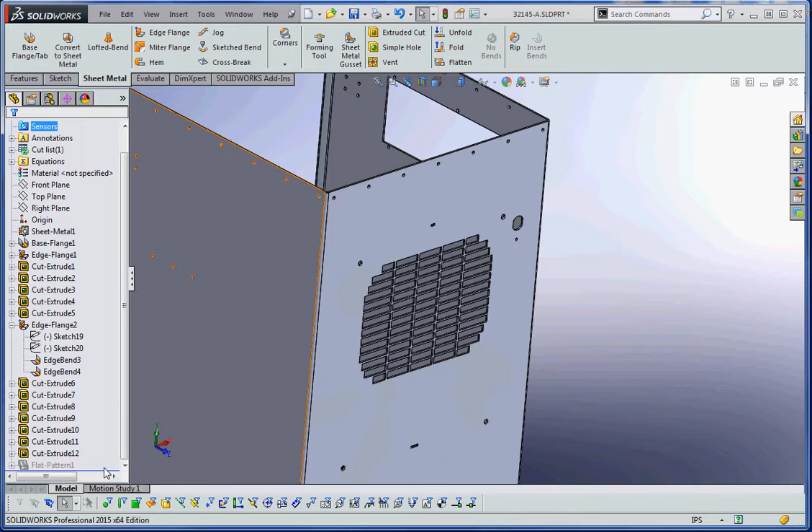Hi Matt, I promised you a video, so I thought I'd show you a video of the part you sent me and the parts that I made. There's a lot of similarities, so I think we're doing things the same way. But I just want to go through this and make sure the assumptions I'm making are correct.

So let's go back to the base flange in the part that you sent me, which is 32145-A. The base flange is pretty simple, you have your sketch that defines all that. I like the idea of using symmetry in the middle of that sketch, and a lot of sketch geometry in here to lay this out. You do the same thing I do, just a center rectangle, put the dimensions on them, and then put your circles on the very ends to define where the holes are going to be. That works out pretty well.

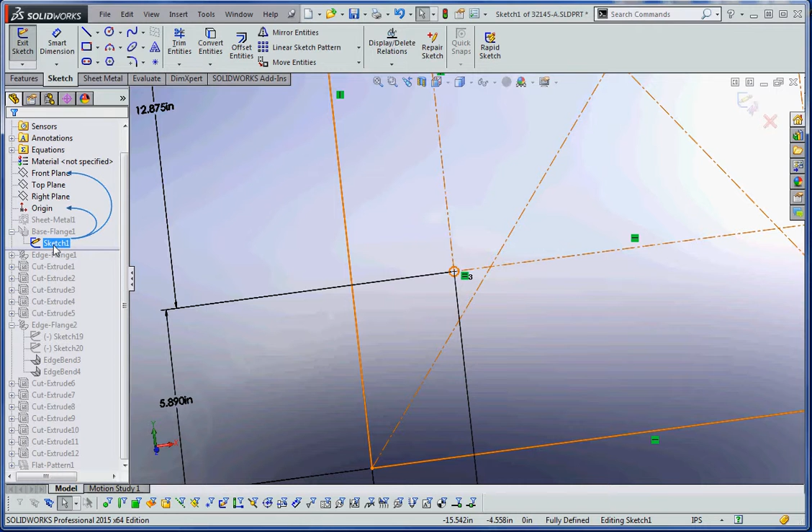The only difference is I usually put my circles that define the holes as a separate feature, something different besides the base flange. Even though I'd probably still use that same sketch geometry, I'd use a different feature, the extruded cut feature, to put those holes in. It gives you a little bit of flexibility, so you can go in there and maybe delete the holes or put them in a different configuration.

So then you put your edge flange in. That's pretty basic stuff, and then you have your extrude for the louvers. And again, you do the same thing I do, a lot of sketch geometry in here, and then we lay this out.

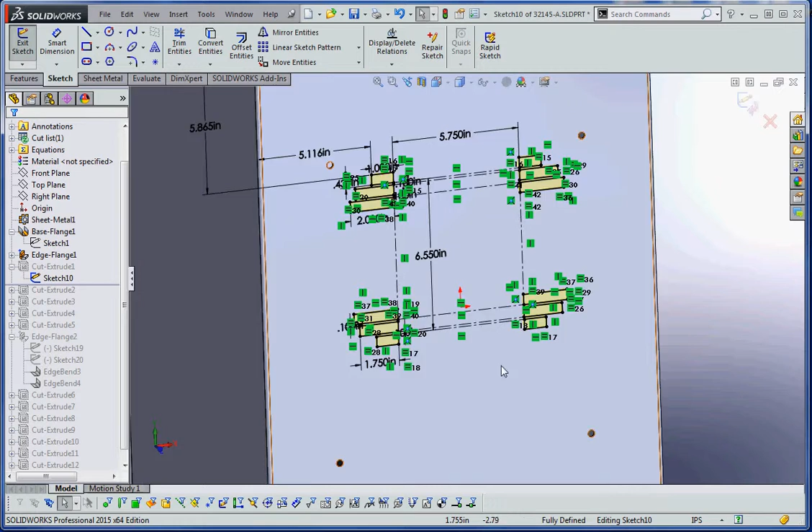One thing I would do a little differently is it appears this is probably going to be in the middle. So I would make some reference geometry to the center, from an axis going along the y-axis, and then put in this dimension. Instead of having it as a defining dimension, I'd have it as a driven dimension. It would still be visible in the drawing, so when somebody's trying to lay this out, they can lay it out from an edge, since they can't measure from the center. But if the intent is to put it in the center, I would put it in the center too.

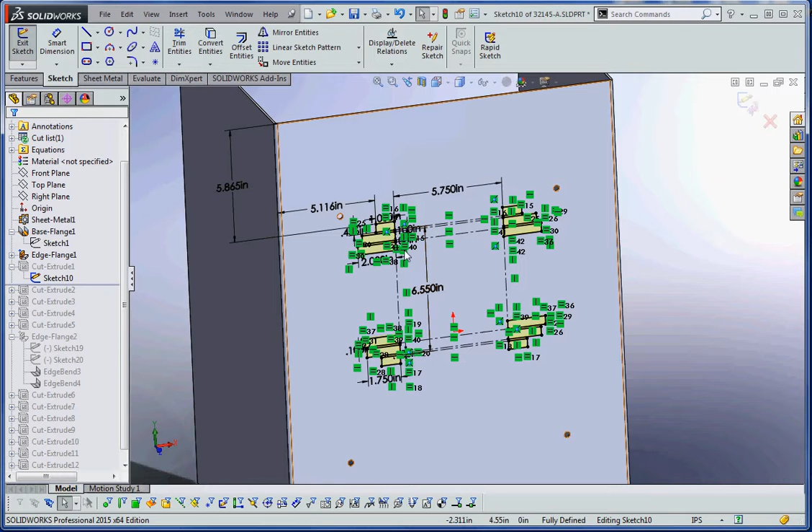But the end result is we end up getting the same thing. One thing I noticed too about this third cut, you have a linear pattern in here. A lot of times these linear patterns are kind of tricky. You define it, but yet they're still blue, they can still be stretched.

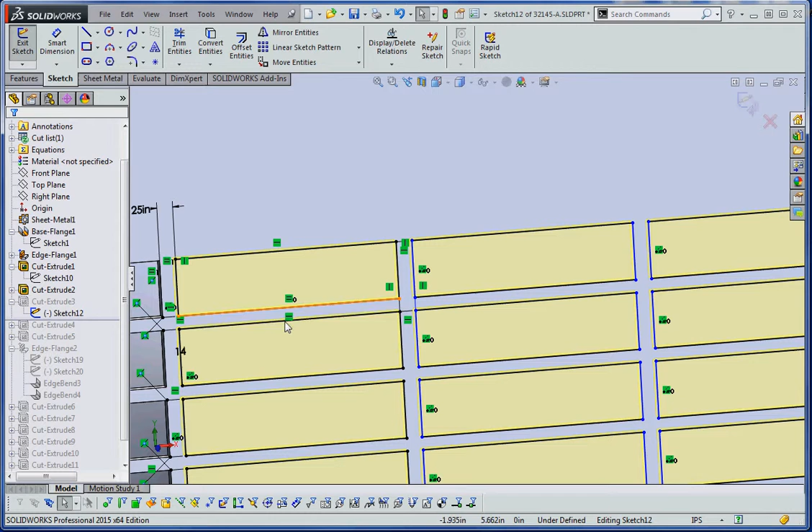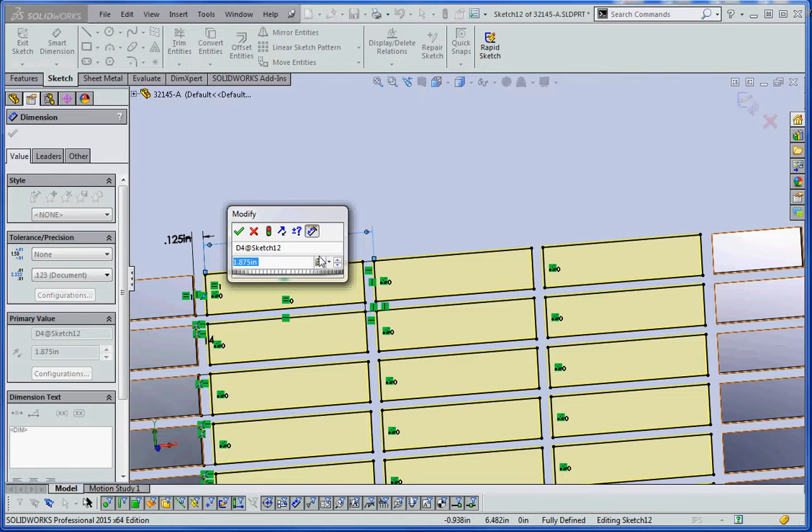So one thing you need to do, and I think you did it here, you have a horizontal relationship between some of these elements, so it doesn't all stretch. But you'll notice if you take some of these blue lines over here, they do stretch a little bit. If you do Control Z, that gets you back to where you were before. But all you have to do is throw in a simple dimension, like maybe from this edge to that edge, which is one full cycle, and then put a green check mark on that.

Not certain what that was all about, but it looks like it turned off my sketch relations, which is probably okay. But anyways, if you put that in there, I think it'll work out okay. Makes it all black, that way it doesn't stretch out on you sometime later.

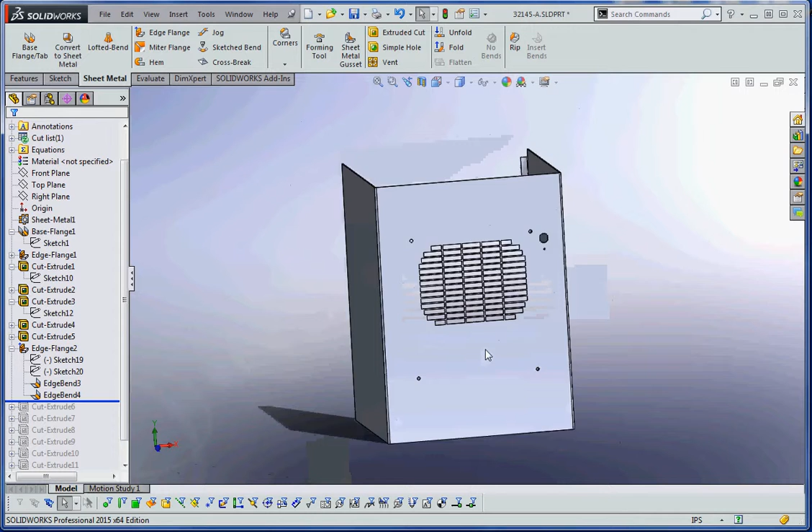And then you put in your features here. You put your edge flange in back, I would assume, to put that other grill in there to provide ventilation or filtration. And then you put in your holes too. I do the same thing.

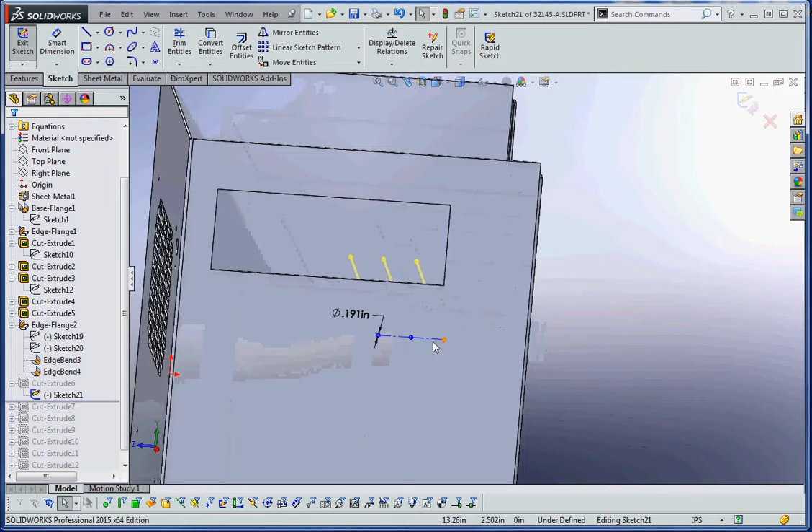One thing I do a little differently is I would put in a sketch that would have all the holes in it, so you have one sketch that drives all the features that follow, or maybe just one feature that has all those holes in it. But the thing about that sketch is you have the capacity to go in there in one location and change some of the holes, because some of these holes have relationships with other holes. It's nice having some sort of sketch document that has all those relationships in it.

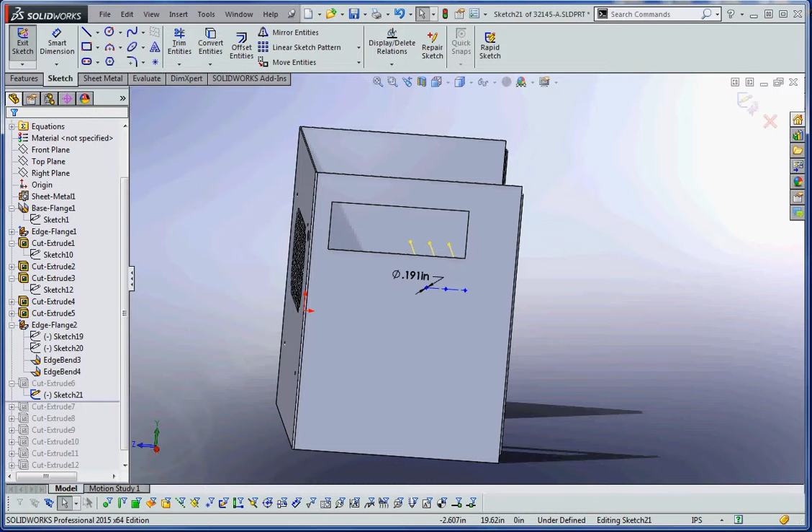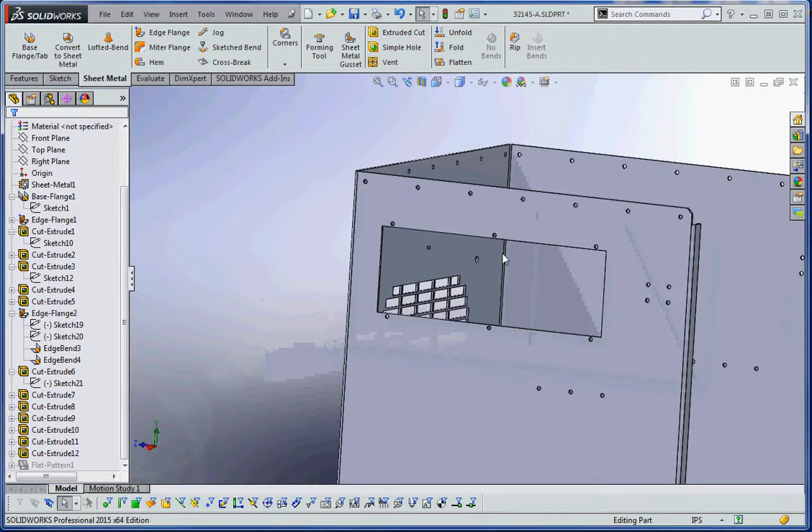Other than that, I think we pretty much do everything the same way. I asked yesterday about the hole wizard, it doesn't look like you use hole wizards. Some people don't like them because there's a lot of assumptions and options to pick from, especially if your hole isn't exactly the way the hole feature wizard's going to be. But this works out just fine, just having those holes in it the way you have them.

So that's it for this part. Next video I'll go ahead and cover the assembly I put together.